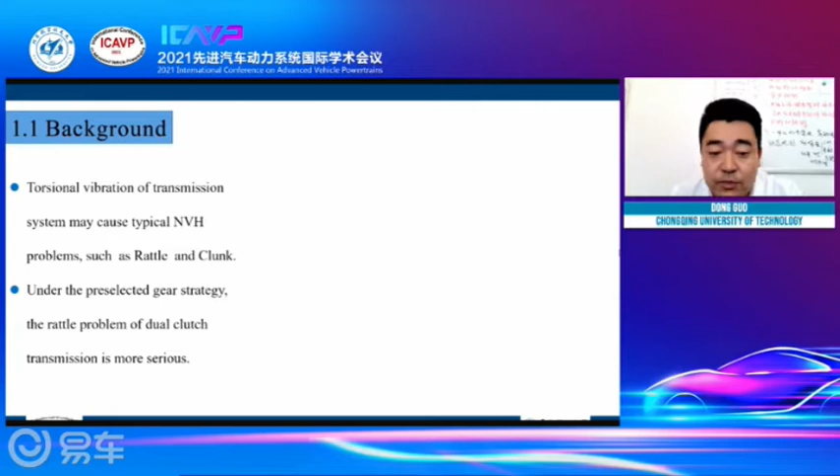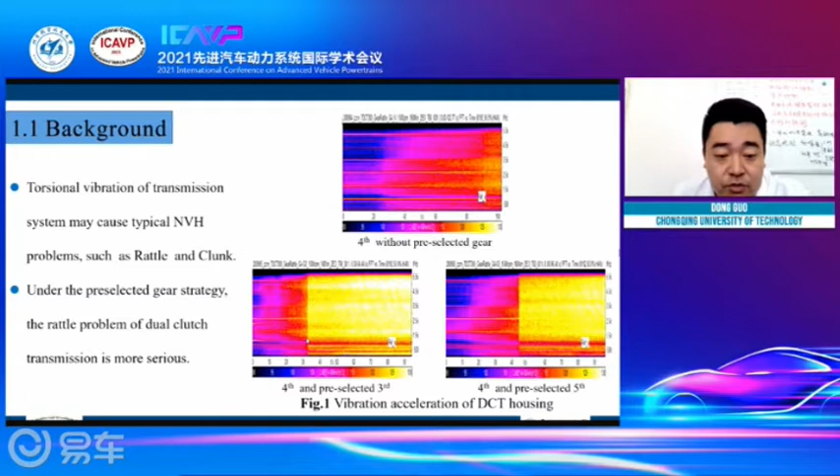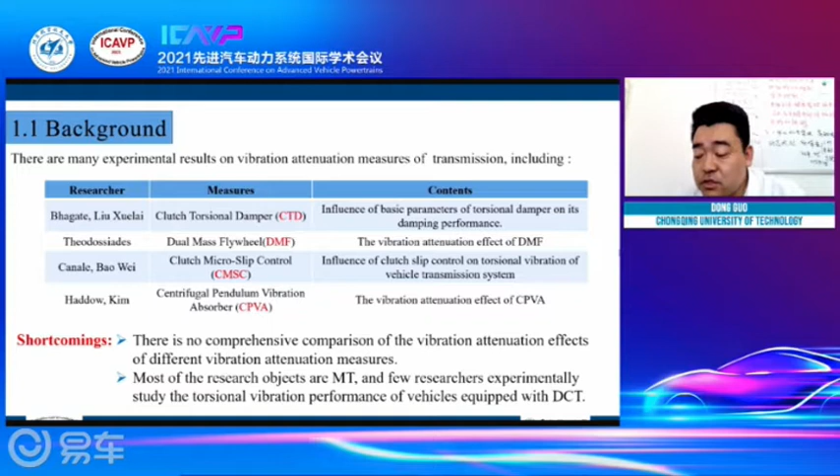And we have made some shortcoming conclusions. In the open literature, there is no comprehensive comparison of the aforementioned four methods. Secondly, most of the previous research is about manual transmission. For transmissions like DCT, especially with pre-selected gear strategy, there's only a little research. So, we have done the four methods in the same DCT transmission.

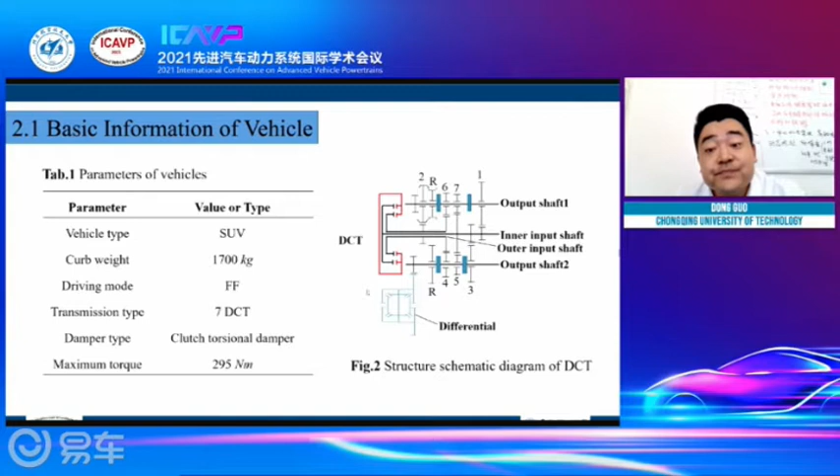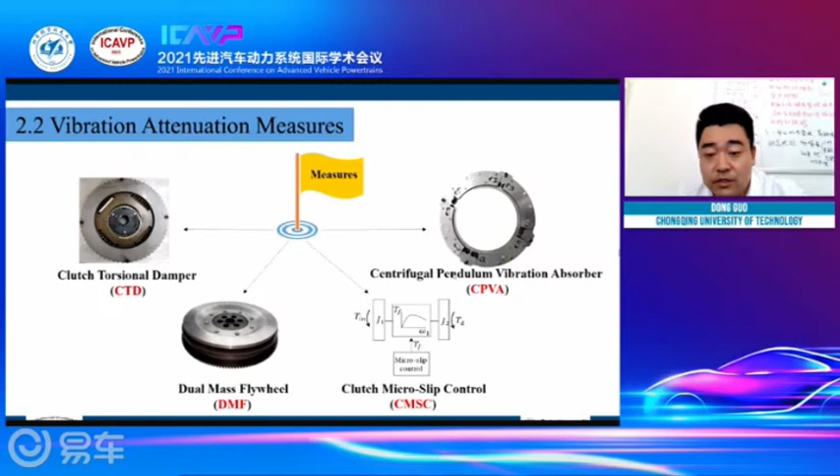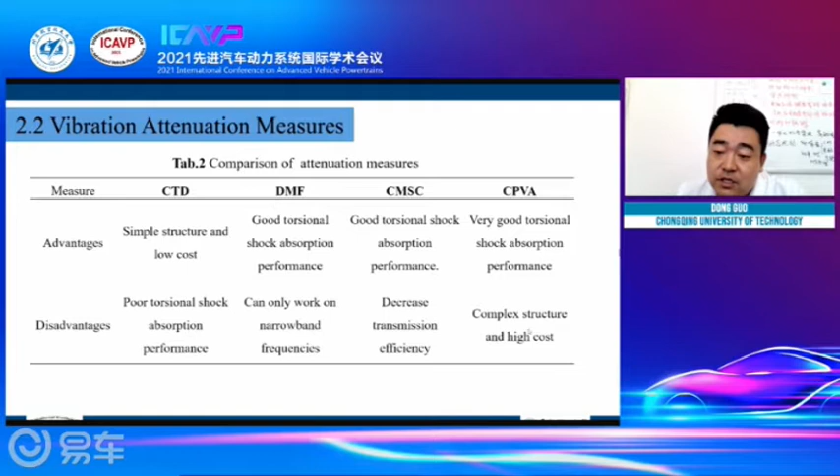Before that, we made tables about the advantages and disadvantages of the 4 methods. The DMF can only work on narrowband frequency, and CMSC may decrease the transmission efficiency. CPVA has a good torsional shock absorption performance, but it's a complex structure at a high cost.

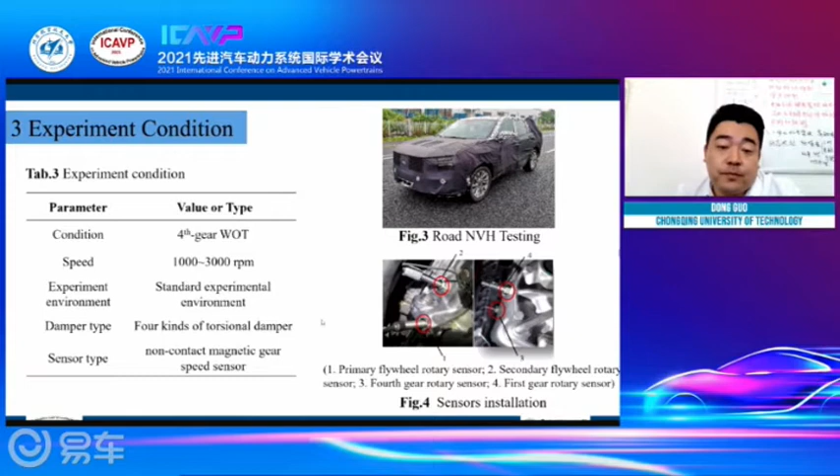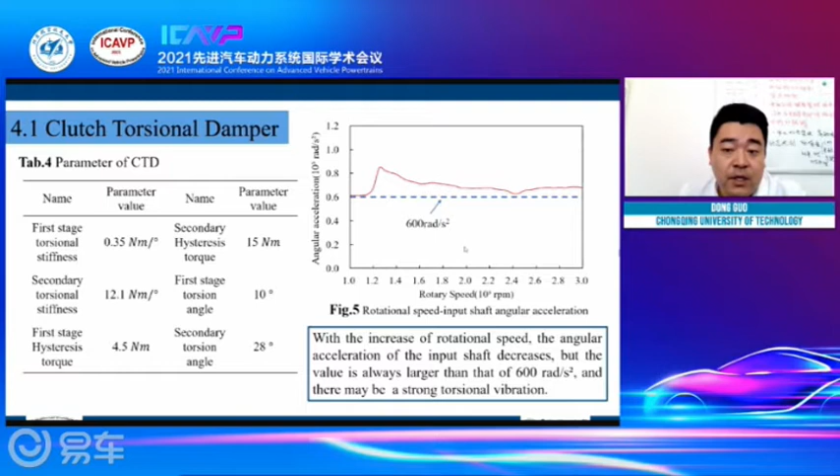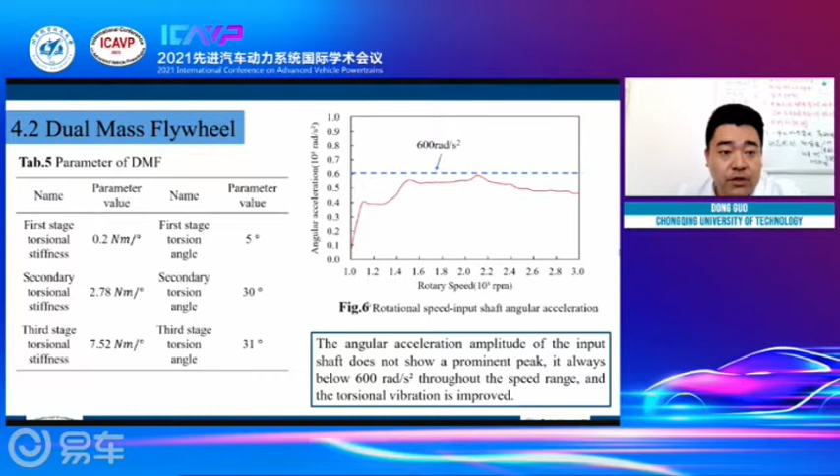The third one is about the clutch micro slip control. In the left figure, figure 7, the blue line is the driving disc rotation speed. The red line is the driven disc rotation speed. You can see the speed differs. The average speed difference almost keeps the same at 20 RPM, which means our control system works well.

Then we did some other testing, where we verified the slip amount, also in CTD and DMF types of attenuation methods. In picture 8, you can see the green dashed line. This is a DMF with 60 RPM slip control. The green dashed line shows the best absorption performance, and the red line is just CTD with CMSC control.

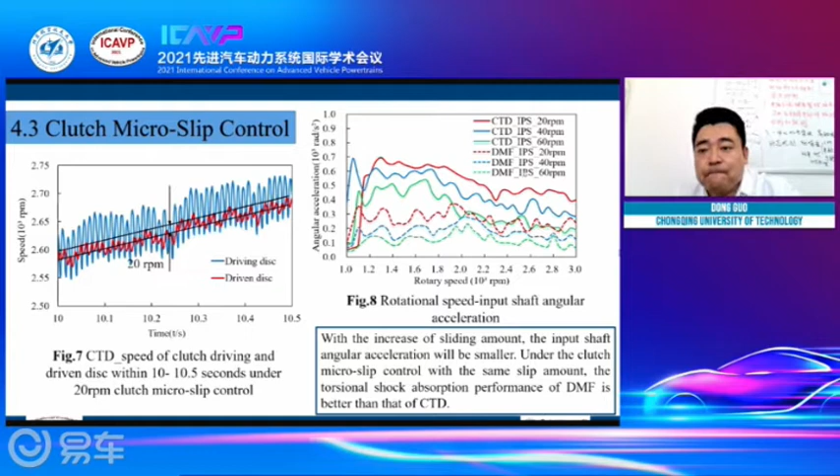Fourthly, here is the centrifugal pendulum vibration absorber, CPVA. These are the basic parameters for the CPVA. The testing results show that below 1,800 RPM, the input shaft angular acceleration amplitude is always below 100, while after 1,800 RPM, the input shaft angular acceleration amplitude gradually increases.

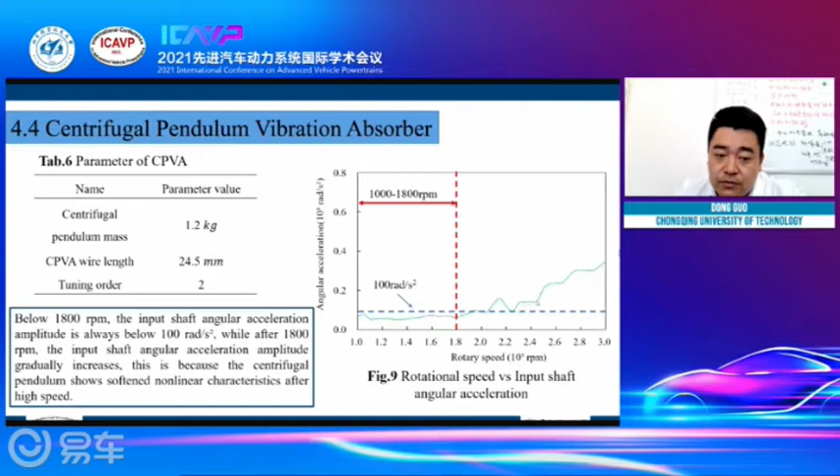Maybe this is because of the nonlinear characteristics of the CPVA. The CPVA always shows softened nonlinear characteristics after a certain high speed. Like this, after the speed of 1,800 RPM, the input shaft angular acceleration will increase.

Finally, we have made a comparison of the four attenuation methods. Figure 10 shows another useful testing result: CTD vs DMF. The dashed line is DMF. You can see when we use DMF, the DMF may increase the primary flywheel torsional vibration.

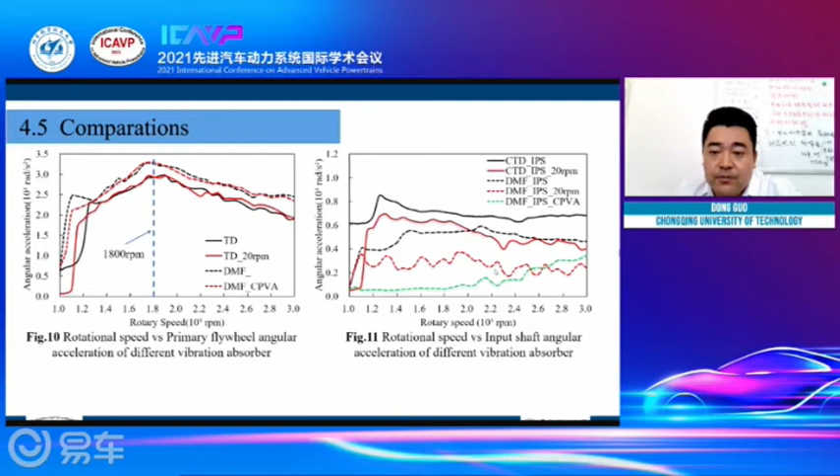Here is the summary of these two figures. The DMF will increase the angular acceleration of the primary flywheel. If we use clutch micro slip control, the torsional shock absorption performance can be improved. And DMF with CPVA has the best torsional absorption performance.

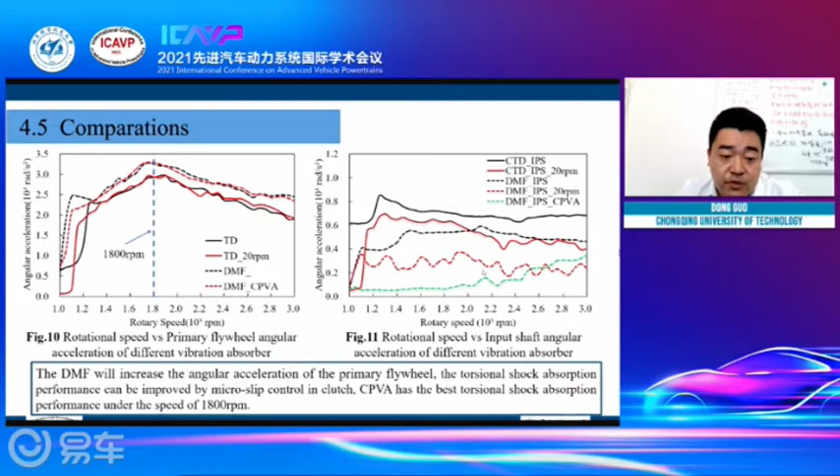Here is my summary. The DMF will increase the angular acceleration of the primary flywheel, but the clutch micro slip control and the CPVA have no significant such effect. Through the road test, the DMF shows a better performance than CTD. The torsional shock absorption performance can be improved when we use clutch micro slip control, but it may decrease the system efficiency.

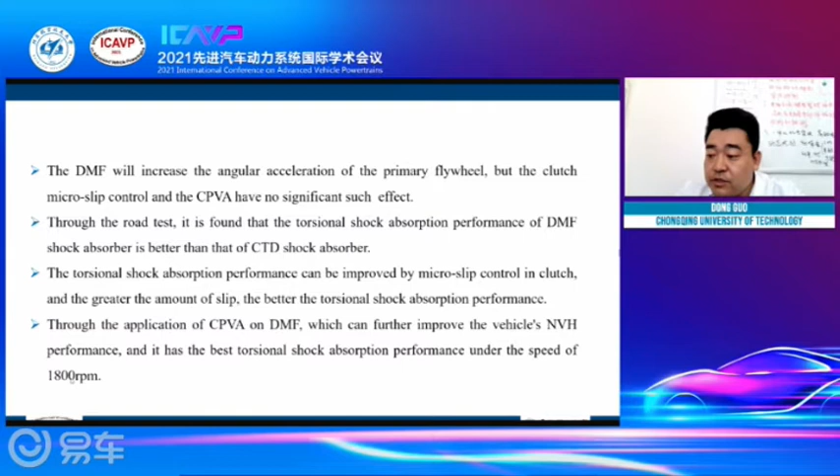Likewise, when we use DMF with CPVA, that can improve the vehicle's NVH performance, but only when the rotation speed is below 1,800 RPM. Okay, that's my presentation. Thank you very much.

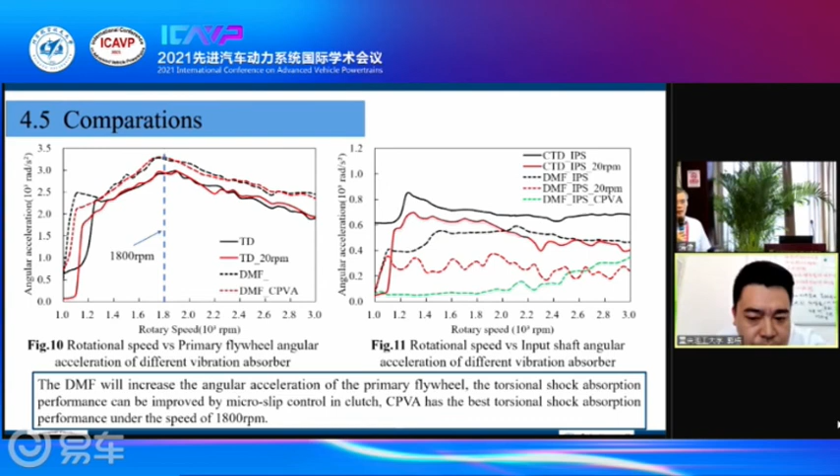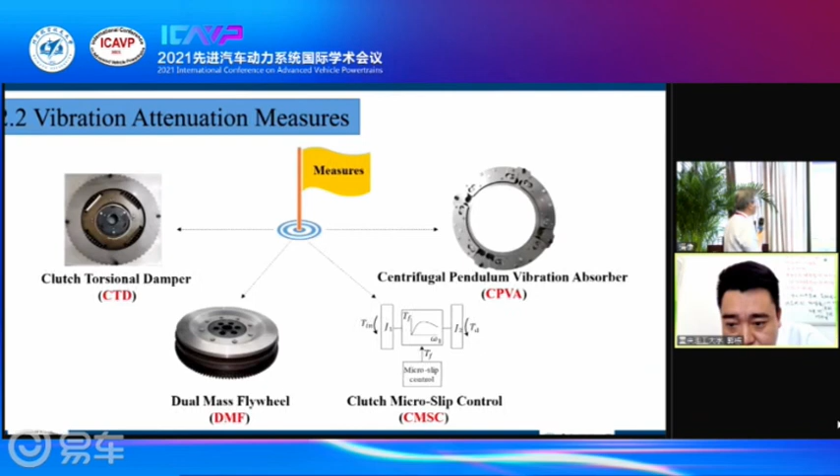Another question: in terms of the cost of the two dual mass flywheels, the red and green lines, which one is more expensive? The DMF with CPVA. We can apply CPVA to the DMF, but it's high cost. Our ongoing research work is about CTD or single flywheel with CPVA. That will lower the cost.